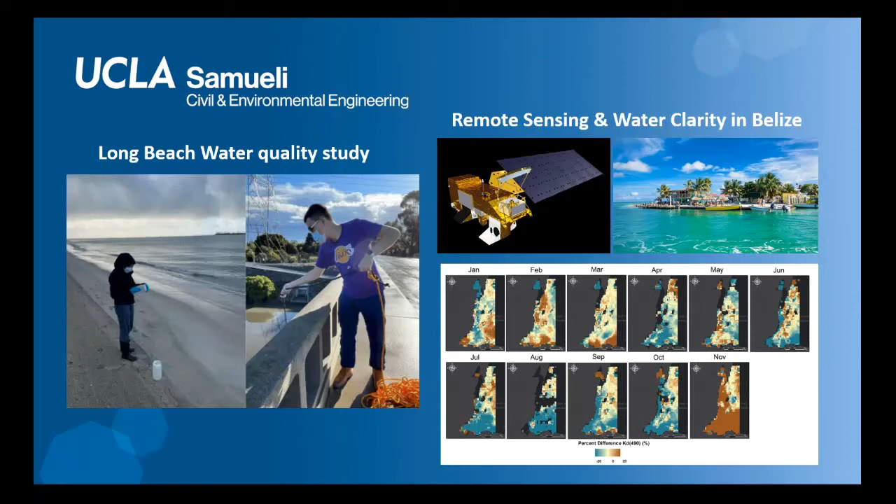We have not yet been to Belize, but we had a new project and published a paper showing that decreased marine traffic from the COVID shutdown made the water quality in Belize noticeably clearer, using data obtained from satellites. That was pretty interesting—we had to re-gear to keep our research going during the pandemic.

Back in Los Angeles, we've been studying how water quality, the contaminants that come out of rivers, creeks, and storm drains, impacts recreational swimmers and surfers. This is our surfer project where undergrads create and maintain a presence on two different beaches, recruiting surfers and monitoring their nasal cavities throughout the wet season. We're also measuring what's in the water at the same time, extracting DNA and growing bacteria from both the water and the nasal cavities.

We actually showed a big increase in MRSA in the surfers' noses after the rain. So you definitely want to pay attention to the swimming advisories when you come to Los Angeles.

We want to figure out where these organisms are coming from, specifically the MRSA showing up in our surfers. So we're looking not only up the creek, but also in hospitals and other sources. This is Marisol Sierra sampling raw sewage from one of the towers at the UCLA Medical Center, so we can compare different areas of the hospital to determine what types of microbes are entering the sewage system and becoming an eventual source to the environment.

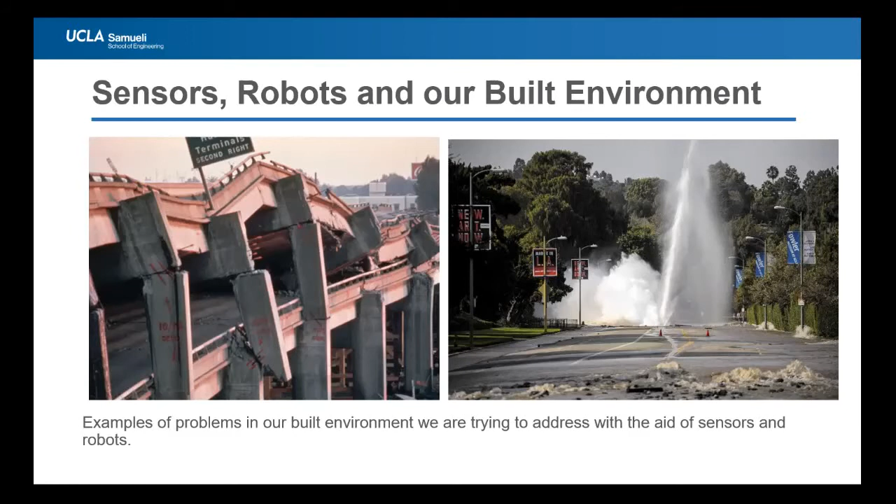The main advantage of these robots is they're able to visually scan areas just like a human would, but at the same time, be able to create a permanent digital record of what they're scanning, which we can then use to process the data using powerful algorithms such as artificial intelligence.

Of course, I'm showing you just examples of robots that we work on, that are made to work in open spaces such as bridges or industrial facilities, but we are also looking at developing sensors that can be installed in very confined spaces, such as inside pipes, on fire hydrants and things like that, to understand where vulnerabilities are in these buried environments.

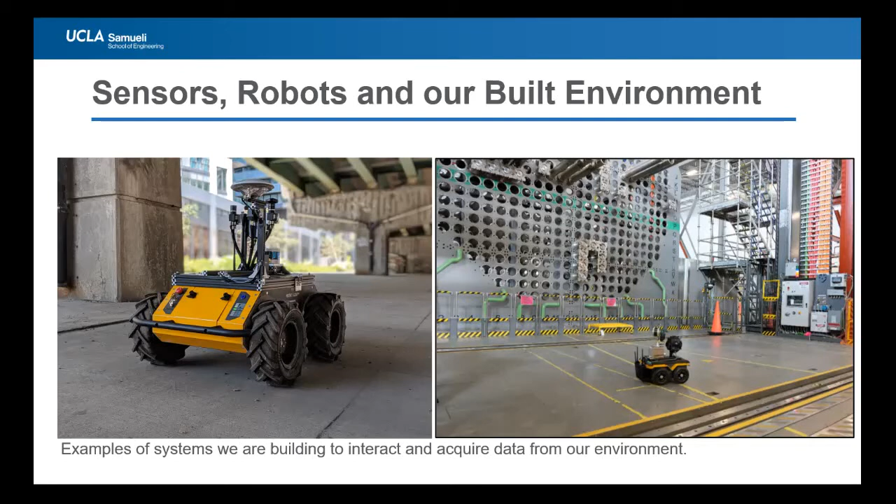Sometimes it is very difficult to get any insight from the data itself. So what my group has been working on is developing advanced mathematical methods, data mining, and probabilistic algorithms that we can use to reason with that data. We can look at this data and try to answer questions relevant to civil engineers - for example, what is going to happen to the structure if there were an earthquake, or is there potential for a burst on a pipe.

So we are looking at mathematical techniques, algorithms, and models which can ingest data coming from these robots and other sensors and yield actionable knowledge, so that we can be forewarned about any impending failures. Thank you.

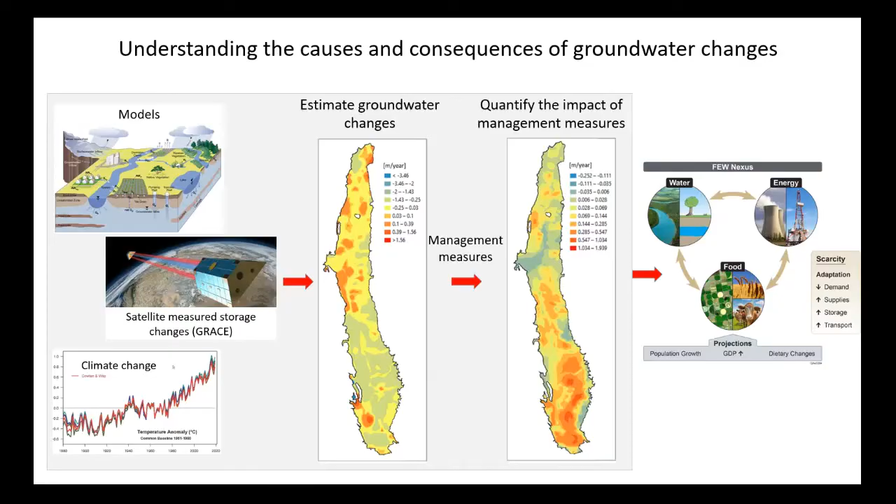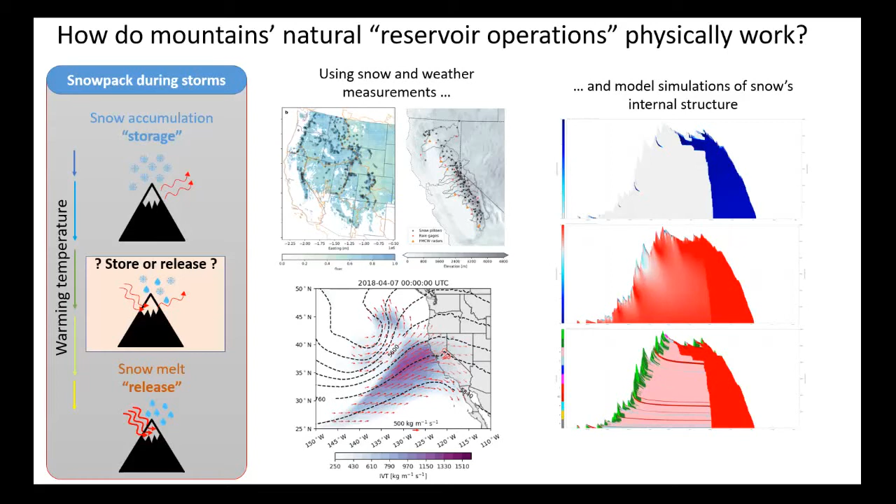So what we are trying to do here is develop and use scientific information and tools to increase hydropower generation. Our work involves climate forecasts, because understanding what's going to happen in the future is very important.

And we take the climate forecast, we correct the issues of these forecasters, and then we improve the quality through data mining and combination with satellite data.

And then once we have that, we have to convert that into flow. So that requires modeling. Once we convert the forecasts into flow forecasts, then we have to do an optimization system.

A couple of cool things that we do: first off is laser cutting. This is how we make our floor plans. We have a sheet of balsa wood, and we go down to the first floor of Boelter Hall and get it laser cut for free, which is cool. So if you want to learn how to cut with a laser, come to us.

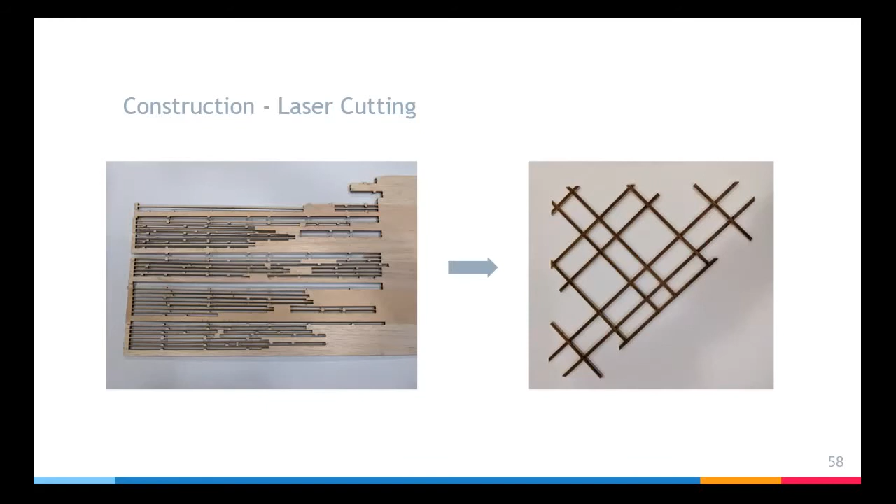We also do 3D printing as part of our construction process. We design little cutting and gluing templates, and we 3D print them also on the first floor of Boelter, also for free. Last year, what we did was we made all the braces and then pre-made the walls, so we made the whole wall at once.

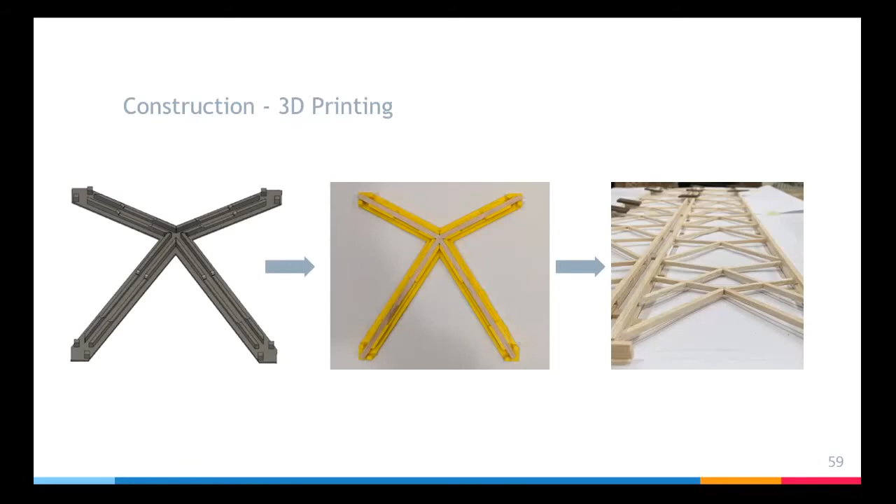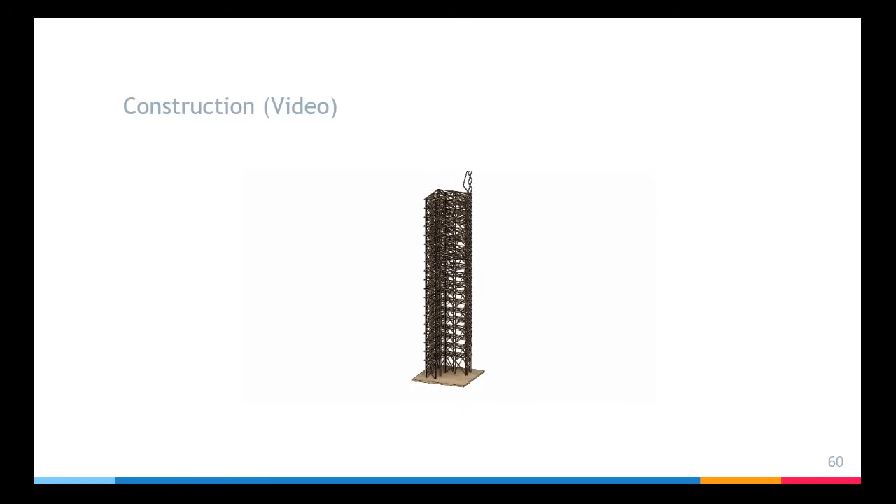This is an overview of our construction process. We start with putting one wall in the base plate, then we do 2 more walls into the base plate, and we start putting in floors from the laser cutting that I showed you. Then we put in the last wall and some more columns and braces, and voila, our structure is done. It's pretty fun to build, and you get to learn how to make a cool video like this, which we did ourselves.

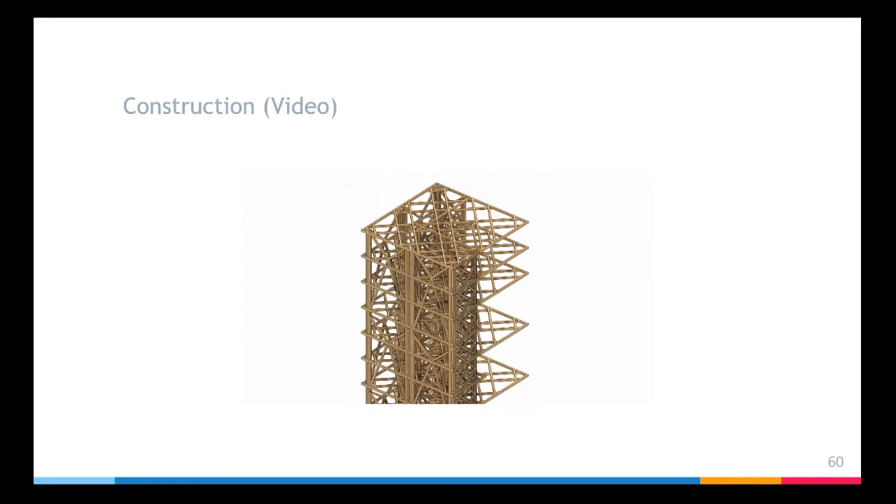This, I'll just let it do its thing. It's not the worst of it yet.

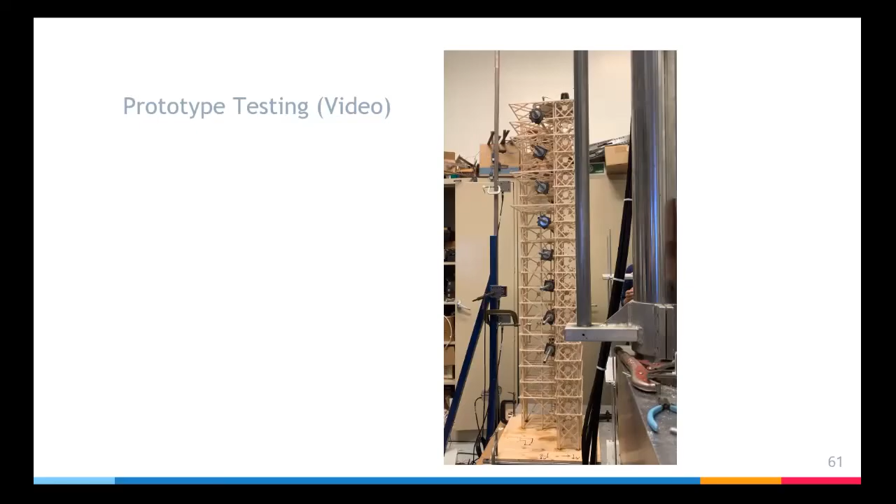That's all I have for the Seismic Design project, but I'm also going to tell you about the EERI student chapter. We're actually called EERI SEAOSC. EERI is the Earthquake Engineering Research Institute, and SEAOSC is the Structural Engineers Association of Southern California. So kind of a lot of words, but basically we're into earthquakes and structural engineering.

The goal is to reduce earthquake risk and advance the field of earthquake engineering and structures.

The strategy to do that is to build the next generation of leadership in the field of earthquake engineering. That's kind of the goal of our club and all our activities: to get all of our students ready for their careers in earthquake engineering and to be able to make all of infrastructure safer in terms of earthquakes.

These are just a few of the things that we do. We have a lot of research events, so if you're interested in getting involved in any of the research you heard about, we have PhD students come talk to us, and we can help you get research positions with them. We have lots of technical webinars we've been to this year, and office visits with different companies, which helps you get a job in structural or geotechnical engineering, plus a lot of professional and research opportunities if you're interested in this field.